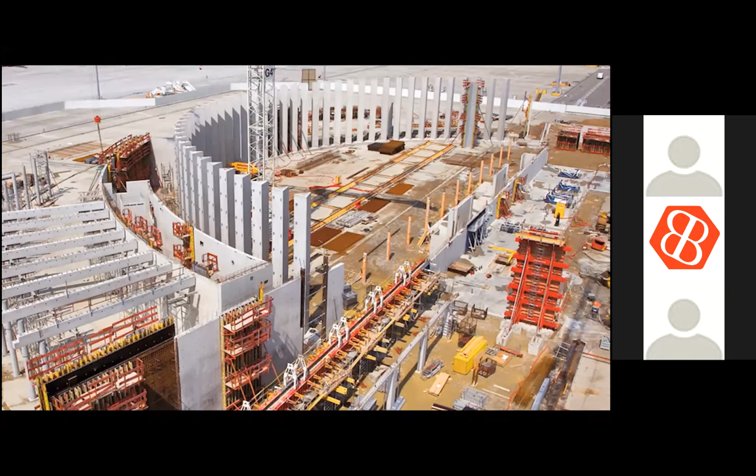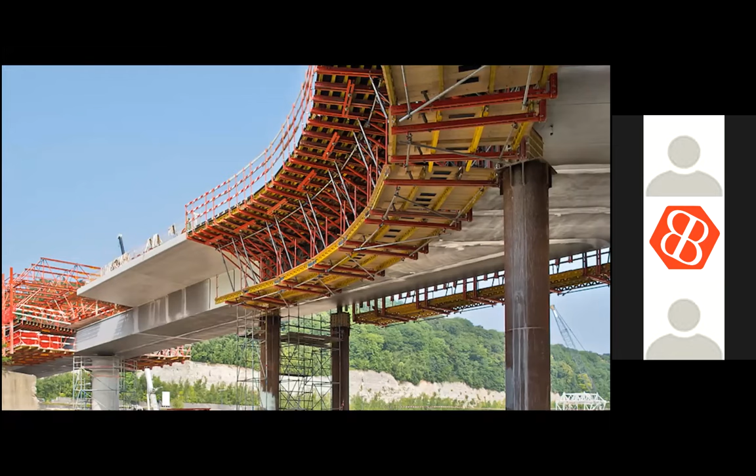Since 1969, PERI's unwavering passion has seen us grow into one of the world's leading formwork and scaffolding companies. We take pride in pioneering new construction trends with a range of products that can be pre-assembled and designed to optimize the building process. It's the driving force behind our success and what makes us an international partner.

South Africa's construction industry has been operating in extremely challenging conditions. But we South Africans are a resilient nation. We are built to last. We adapt, we unite, and we forge ahead, finding new solutions to help build a sustainable economy in which we all can prosper. We can't imagine a world without construction, for it is the catalyst that enables economic growth.

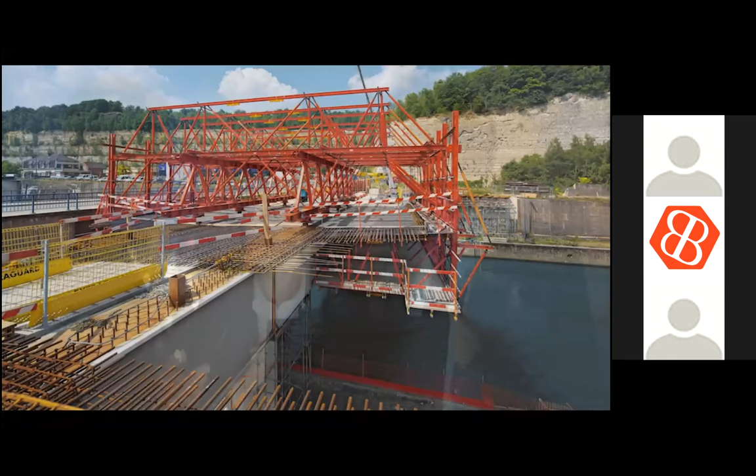By working closely with governments on infrastructure projects such as reservoirs, dams, bridges, and housing, we are actively helping to shape the country's future. We're proud to be PERI, but we're also proud at PERI to be associated with an industry that creates employment, makes roads safer, connects cities, builds schools for the children of our future, and attracts both local and foreign investment back into this beautiful country of ours.

We are committed to partnering with our customers and the construction industry as a whole, as we pioneer the future construction trends through engineering, creative, and economical solutions. We make construction more efficient, faster, and safer. Providing the best service to our customers is what drives us every day.

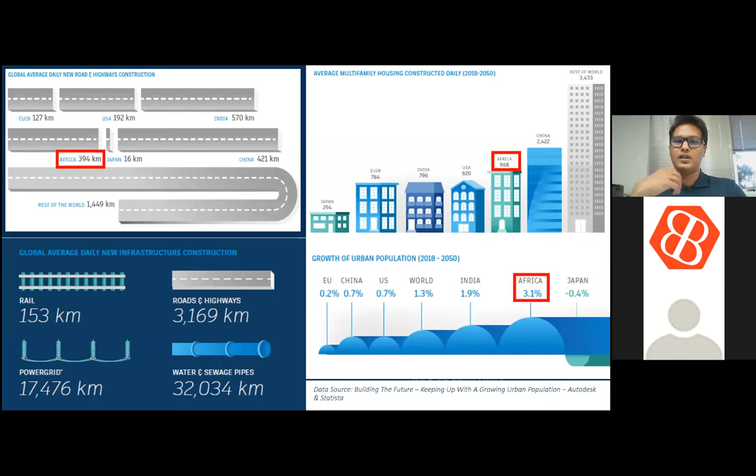Now let's zoom into Africa as a continent. As you can see, for road construction and highways, 394 kilometers. Bear in mind, the key word here is daily, not yearly. If you're looking at housing, Africa, 968. And if you look at our urban population projected to 2050, 3.1%, it's higher than all of those there. So our state of urbanization is much more on an increase because we are a developing continent, and that is why we need to cater for much better civil infrastructure.

So to put it into a nice picture, we always prefer pictures. This is what we're looking at when we're projecting up to 2050. You can see rail, about 153 kilometers, again daily averages. Urban buildings, 13,213. Power grid, 17,476 kilometers. Roads and highways, 3,169. And water and sewage, 32,034 kilometers.

Now, those are all staggering numbers, especially if you're looking at being efficient in service delivery, civil infrastructure. All of this plays a critical role in delivering that.

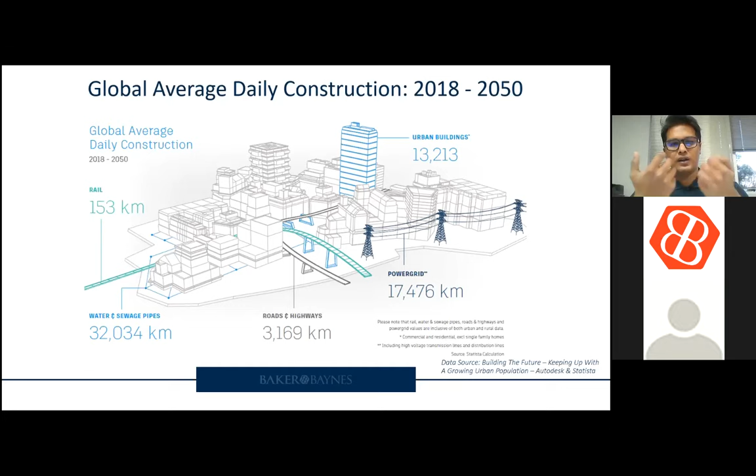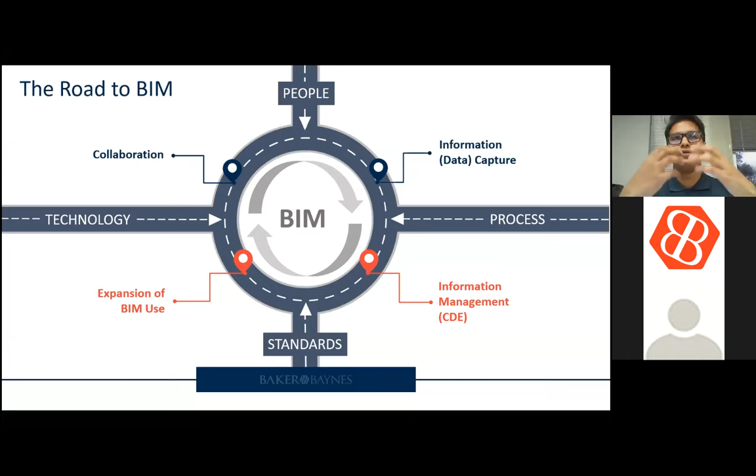Once you get onto that portion, you can expand its use. If you have a BIM model, maybe of a road, a building, pipe network, you can actually use it for further operations and maintenance and other BIM uses.

So business benefits of BIM: a big one is competitive advantage. If you're using intelligent methods, intelligent workflows, innovation, there's a lot of benefits that come with that. It always puts you ahead of the curve because you can deliver faster and more insightfully compared to your competition. And that has a ripple effect on increased profitability, because you're designing in a much leaner, economical, innovative way.

And it makes hiring and retention better, because now you have the people, you grew them, they become synced into this workflow or method of working, and you're building a really formidable crew. And this is very good when you're looking at reduced business risk, because you have a more holistic overview of what you have done.

So those are four big business benefits. From a project perspective, if you're looking at project management, what was captured and documented showed 33% fewer errors. That is a huge chunk. Especially dealing with projects here in South Africa, we know what happens, right?

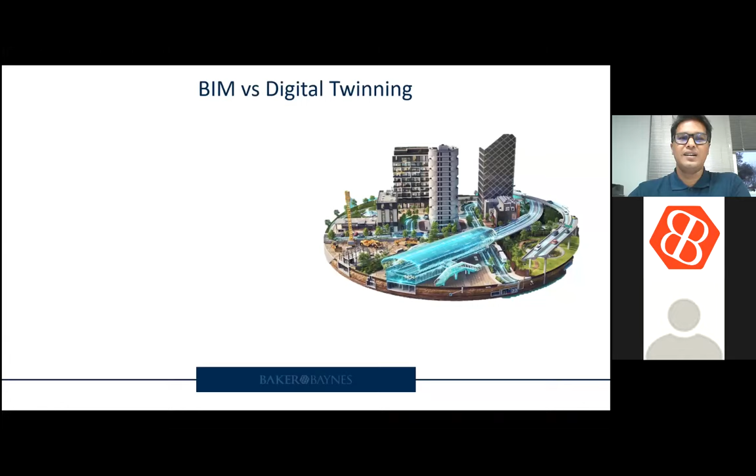So BIM versus digital twinning - what's the difference? We've had a lot of back and forth with this on social networks and stuff like that, but here's to demystifying it once and for all.

So just a fun fact, the first practical definition of a digital twin originated from NASA when they attempted to improve the physical model simulation of spacecraft in 2010. A nice fun fact there.

So a digital twin is a virtual representation. Digital and virtual are different. It might sound very similar, but it is different. I'm going to use a weird example here: Iron Man has a personal assistant called Jarvis. Jarvis is the key that is achieved when you have a digital twin, because it will analyze everything around you and give you more data, live feeding data, to make a much more informed decision. That's my simple way of putting it to you.

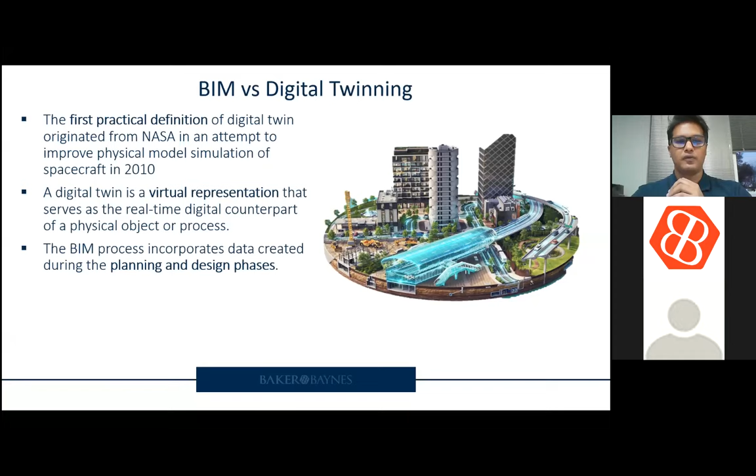Whereas BIM is the digital representation of your environment - of a building, a road, a rail network, a pipe network, utilities, those type of things. And the data is created normally from inception or planning right up to design phases.

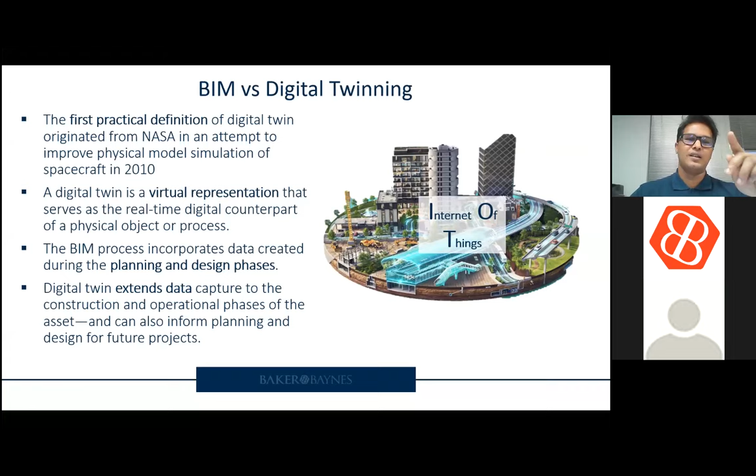So digital twinning takes this data that is created during the BIM process and further extends it, where we integrate it with other systems, and these systems are called the Internet of Things. Now this is where you are transitioning towards building a digital twin. BIM is the most efficient path to get there, because now you have a digital replica or digital representation of your environment or of your asset. And from there, you can link in the Internet of Things.

If you haven't heard of IoT, it's an ecosystem that consists of web-enabled smart devices - you use sensors, embedded systems, processors. It collects all that data, monitors it, or provides it to you. And the data acquired from the environment is where you make your analysis or in-depth decisions. In a nutshell, it is Industry 4.0.

So the fourth industrial revolution - a lot of people have this misconception that it's only applicable to the manufacturing space. I'll give you a brief description of what it actually is. The first industrial revolution came with the advent of mechanization, steam power, and water power - remember seeing those steam trains? That was it. The second industrial revolution revolved around mass production and assembly lines using electricity. So you can see it has gradually improved.

And then it was followed by the third industrial revolution, which came with electronics, IT systems, and automation, leading us to where we are now - the fourth industrial revolution, or 4IR, associated with cyber physical systems. So that's how it has progressed over time.

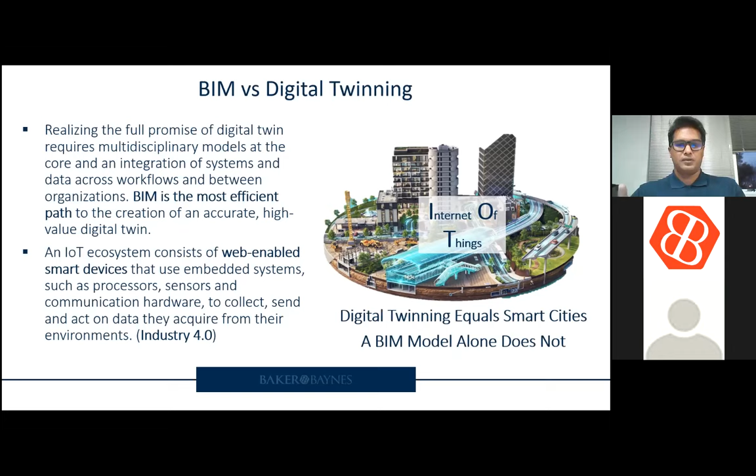To sum up what I've said, digital twinning equals smart cities, whereas a BIM model alone doesn't. It'll put you on the track there, but it's not a digital twin - it is a digital representation.

To further distinguish this, I'll conclude with digital twinning on this slide here - credit to Dr. Calayde Davey for this, it was very well put forward. So BIM, or building information modeling, is the process of creating and managing that BIM model. Like I said, it's a digital replica that you need to update every time you get data, because it is of a static nature, meaning it's not dynamic. You can make a decision while modeling, you can review it, but it is definitely not dynamic - it is the starting block leading to digital twinning.

Now, digital twinning is a real-time digital replica of a physical asset. Think of it as a living, breathing asset, where you continue to get live feedback loops between the model and reality. It keeps feeding information, analyzing, optimizing, those type of things. And digital twin technology uses automated sensor technology for live updates, so it keeps getting filtered and fed to your system.

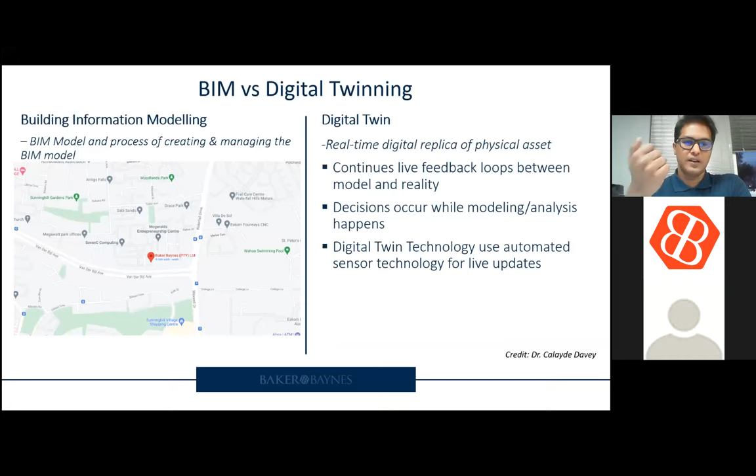The easiest example to put this forward to you is Google Maps, right? So on the left, you can see it'll give you where the position of the building is - in this case, our office.

What digital twinning will do is give you all of the analyzed options to get there. It'll give you the quickest route, the slightly slower one, based on the time of day, traffic density, all of those types of things. So that is the clear-cut difference between building information modeling and digital twinning.

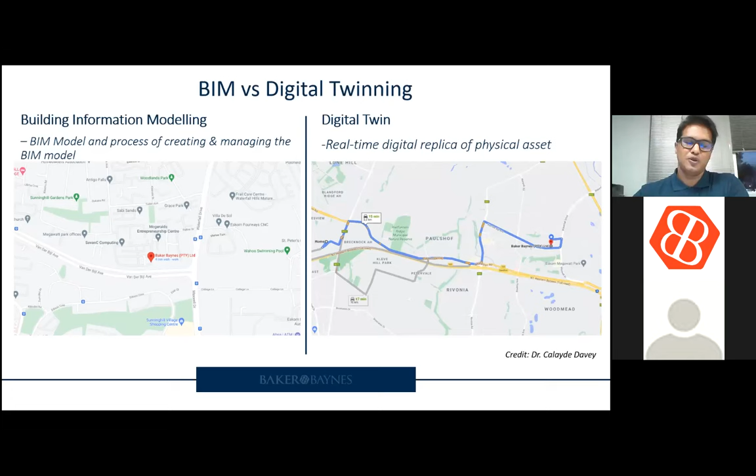But that is my bit on digital twinning versus BIM, and I hope it came across quite cool.

Next, what's making this all possible—you're seeing right now how valuable the BIM process is, and why we need it in our industry. This ties in directly to what BIM mandates are. So if you haven't heard of what BIM mandates are...

Think of it like this: a lot of research went into this, a lot of troubleshooting, people applying it. And when they saw the positive feedback and the benefits you could actually reap from this, they decided to mandate it and make it legislative.

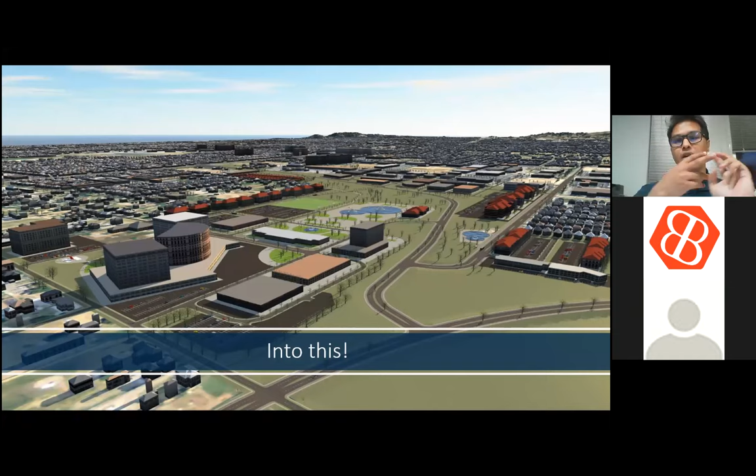All of those have metadata linked to it, meaning that if I had to click on that road, on that drawing, or on that model, I would be able to get elevation data on there. I could do a stepped super elevation on it. I could check where it's dipping below ground, those types of things, all in this type of environment.

Same with pipe utilities below ground—you could actually go and click on it, get all the metadata, see what's happening. Same with the buildings, depending on level of detail. All of this has intelligent data linked to it.

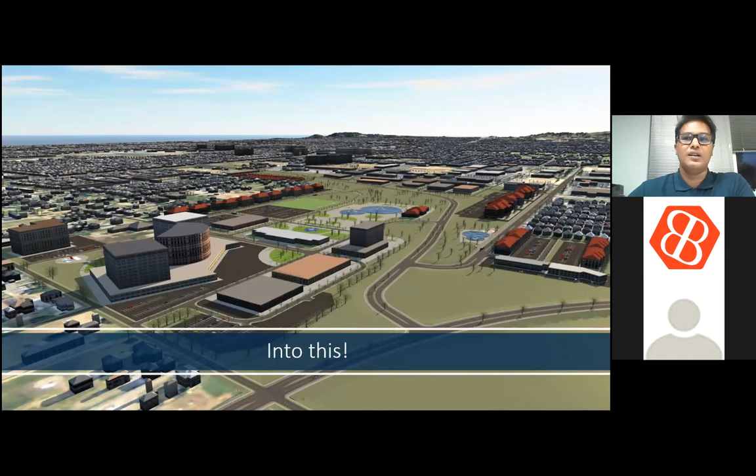Now, if you're thinking this is just a pretty design model and not a realistically done or real-world example, I'm going to give you the reference of the world's flagship in terms of city transformation, smart city—and that is Dubai.

So if they can do it, my question is, why can't we? We have the academic excellence in our industry. We just need to embrace the innovation. That is our differentiating factor right here.

Okay, so let's look at some case studies, right? So it's lining up quite nicely. We're going to look at consultants that have used it not only abroad, but here back home in South Africa. So just in case you think it's an overseas thing, it's definitely not. So let's jump in and look at some projects that were done abroad.

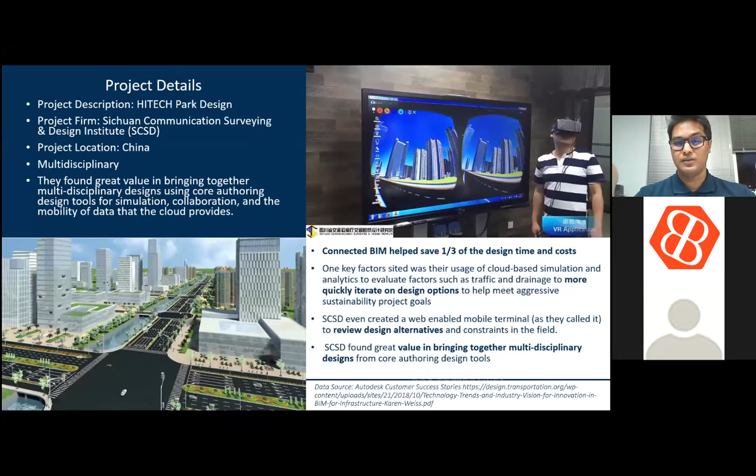Now, looking at a project of this magnitude and vastness, you can only imagine how much this cost. And 33% of that, if you're looking at like 100 million, maybe way more, definitely way more. But you can actually recognize how much you're saving here.

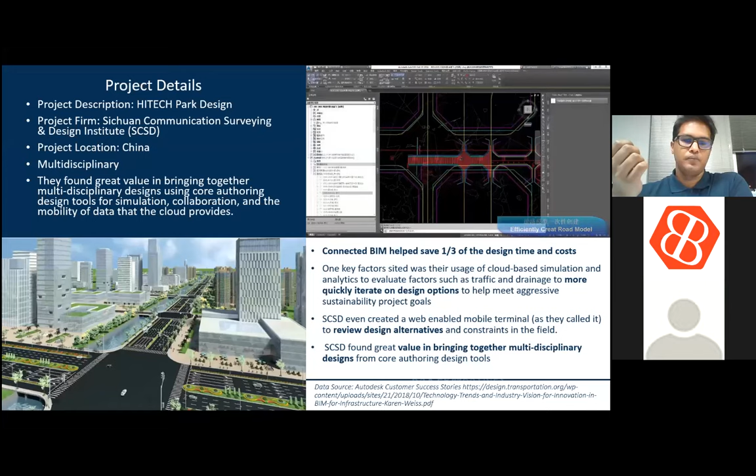Okay, they also used design optioneering. So they were more quick to iterate design options to meet their design targets or sustainability goals. You can see design and sustainability go hand in hand. And because of that, you could review design alternatives, something that they called mobile terminals. And at the end of the day, working with a multidisciplinary team on a common data environment with intelligent BIM workflows and tools resulted in something like this.

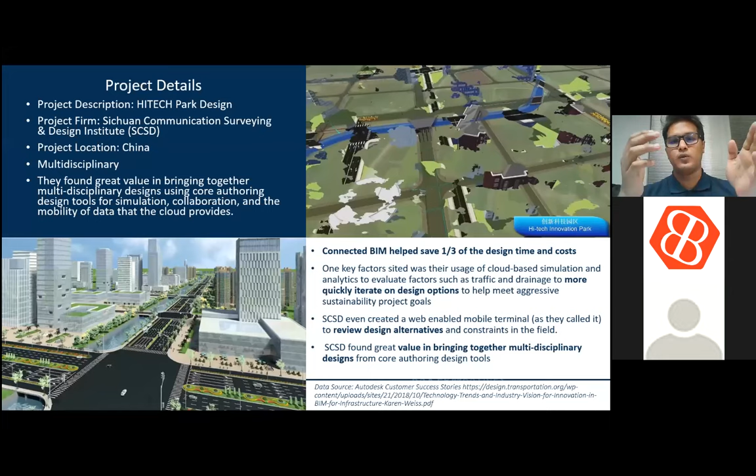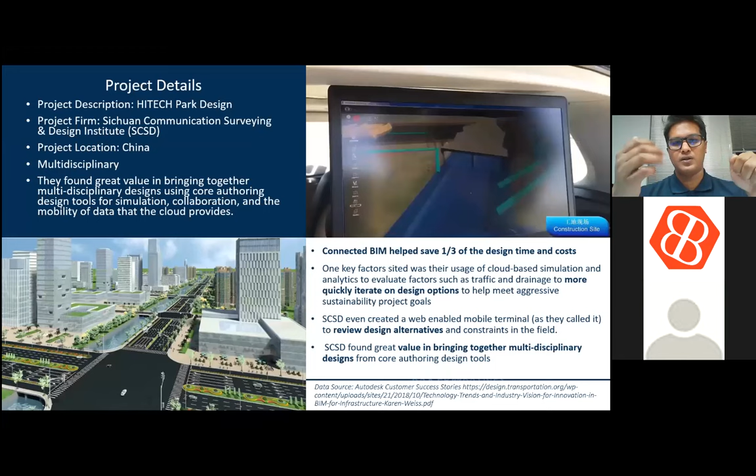You can see real world context modeling right up there. I mean, look at that. That's the VR part of it that you could actually link. And you will even see that the person sitting live in context is looking at where the structure is going on his tablet.

Okay, the last one I'm going to show you from abroad. This is quite a cool project, actually. It was in Norway, high-speed rail, and this incorporated GIS, 3D modeling, analysis. Look at it, you can just look at it. They've zoned the areas according to what they needed.

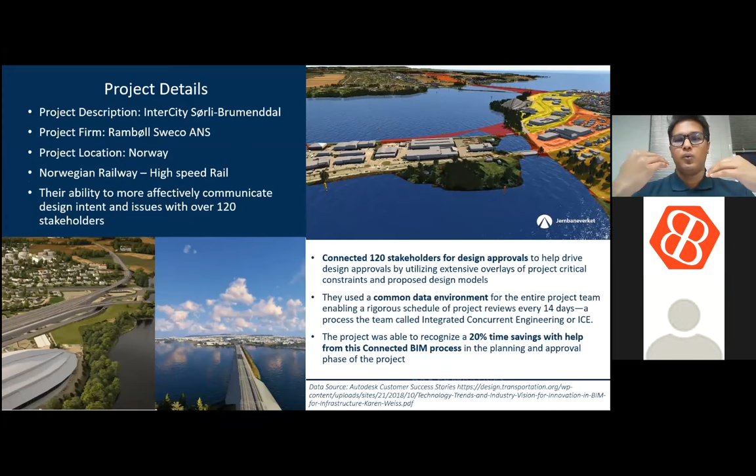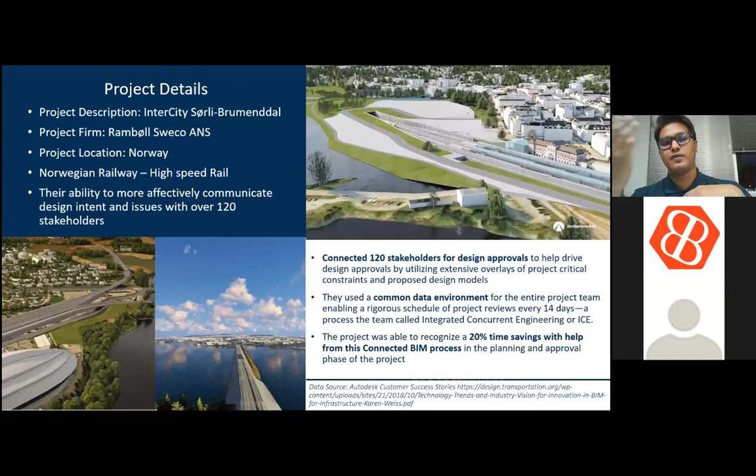They brought in the data and connected 120 stakeholders for design approval. That's huge, right? But this was all possible because they used a common data environment where they could do reviews every 14 days, and they recognized a 20% time saving with help from this connected BIM process. So again, this is all overseas, and you can see the projects are really, really innovative.

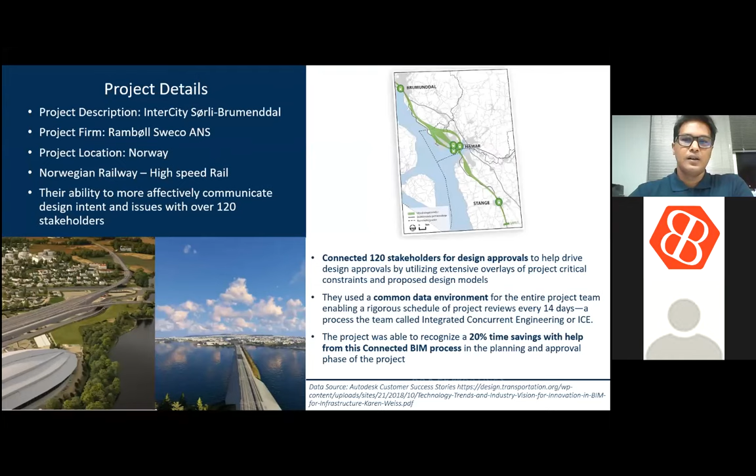All right, so let's fly back into our country, South Africa, and let's look at the consultants that have applied this. There are many, but because of time constraints, I've just chosen about 3 or 4. Let's have a look.

First one I'm going to reference is HHO Consulting Engineers. In this project, it was a BRT station, a bus rapid transit system. The biggest issue felt here was communication of technical data to a non-technical audience. As engineers, we've all been here where people can't understand our designs, and we don't blame them for that, but we need a much more visual, easier way to get across that data.

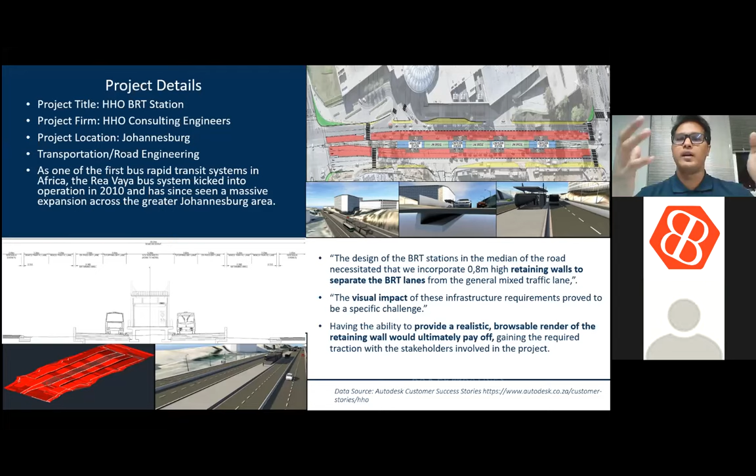So this is in South Africa, okay, really, really innovative here. It was one of the first rapid transit systems in Africa, called the Rea Vaya, from 2010, and it has since seen a massive expansion. So very, very good application here of BIM technology and workflow.

So again, South Africa, this was a really cool project. Another one - I have probably one more after this, and then we'll see how it goes. This was also very innovative for energy efficient construction, and it was done by Lombard Consulting Engineers here in South Africa, for a medical facility, a medical clinic.